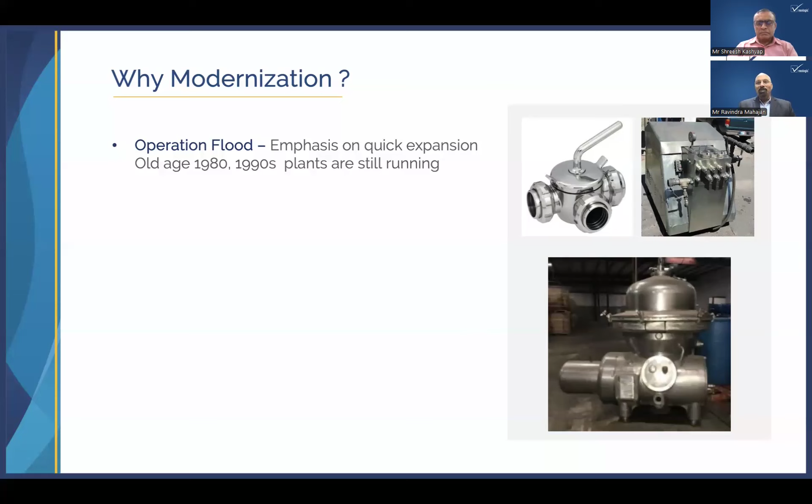There are equipment life issues. The energy efficiency factor is very important today. The old separators are consuming almost double the power compared to new separators. Technological upgradation of such equipment, like old homogenizers and separators, is not possible. Some of the tanks do not have provision to add instrumentation. These systems are old and inefficient, while so many technological advancements are happening. So high processing cost is one challenge of running an old dairy.

There is perishable industry risk, because there are chances of sudden failures - sudden mechanical failures, sealing failures, CIP failures. All these failures are a risk for a perishable industry, and sudden shutdown of the plant totally disrupts production and supply to the market, and you can't accept milk unless there is space in the dairy. Also, obsolete spare parts are an issue - these equipments are phased out by the original manufacturers, and you face challenges in getting spare parts.

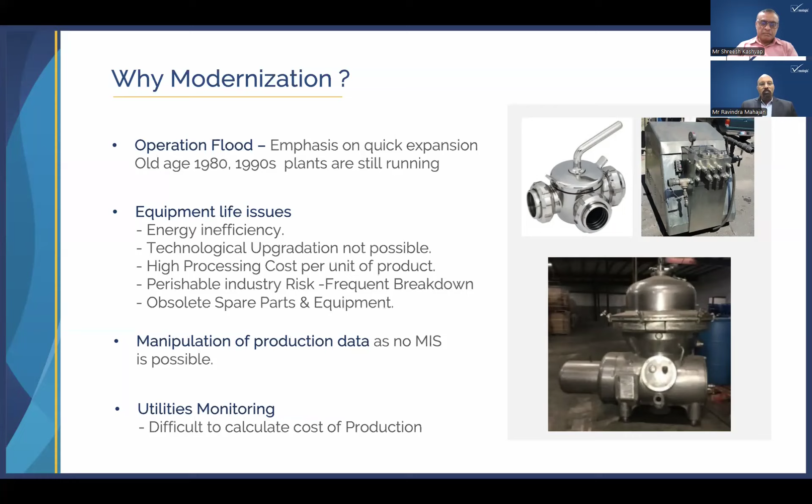Utilities monitoring is difficult. So how efficient my equipment is, how much steam and water it is consuming, it's difficult to know. A lot of water is getting wasted, and water is a costly resource.

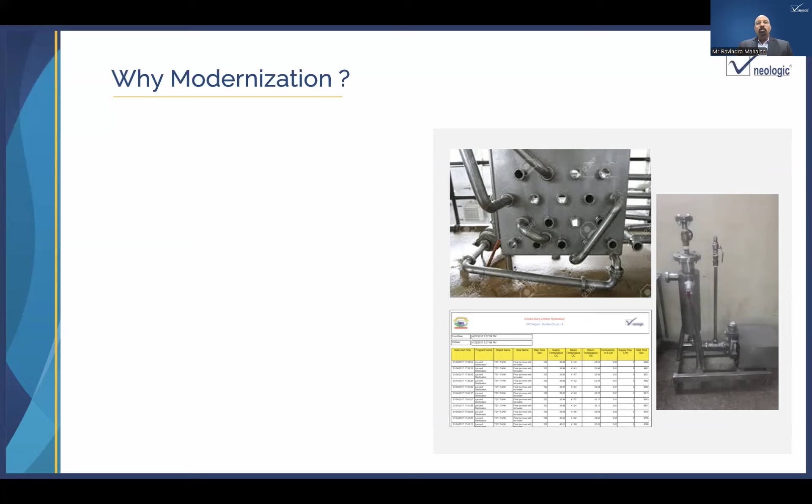Now, you may be familiar with such kind of flow plates. These kind of flow plates are quite common, because they are for the production person's flexible approach. He wants flexibility in taking milk from anywhere to anywhere. Means directly from raw milk to pasteurized milk, to silos, to a balance tank, anywhere they want to take milk, and then they create such flow plates. And it is humanly impossible to remember which connection has gone under cleaning and which is missed out. So this is a hygiene risk.

To fulfill statutory environmental requirements, it is very difficult. Means we have big losses, product losses, and all these product losses end up in our ETP load. And then we have a problem in handling so much product in the ETP. It is an additional loss, but it is also a problem to treat.

Growing demand to have MIS reports. As I said, manipulation of reports can happen. So we have to ensure that all the production events, all the production alarms are known to the management, so as to know what is going well and what is not going properly as per the system. So here are some of the report samples.

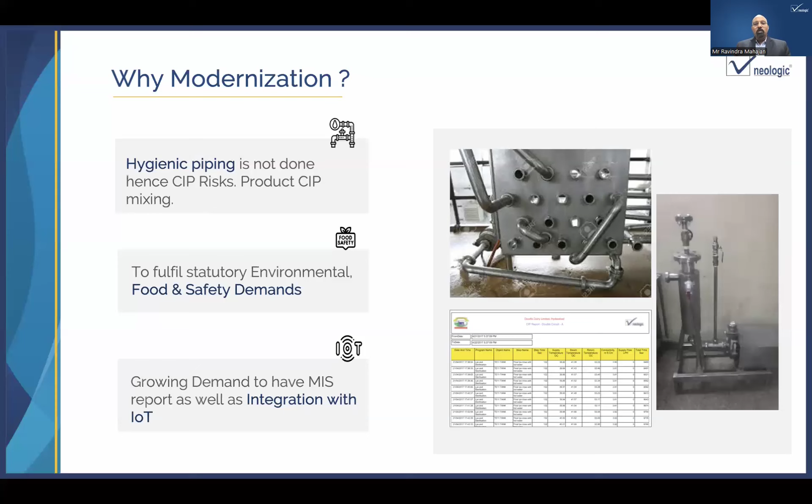Now, in these old dairies, you try to add capacity and you try to add new equipment. But when you add new equipment, even if you have a PLC-controlled pasteurizer, it is difficult to integrate it in the manual plant, because as a system within that module, it is automatic. But when it comes to the integration with the tanks and with the transfer lines, there is no automation. So this is a mismatch of automation functionality, and you really lose the advantage of having a PLC-controlled system added afterwards.

High dependency on operator skills and sincerity. Again, the same point, that operator sincerity is very important. Some operators get confused if there is an alarm, a temperature alarm, what to do. If there is insufficient CIP, where to check the concentration of the CIP. If they are not skilled, it is a risk.

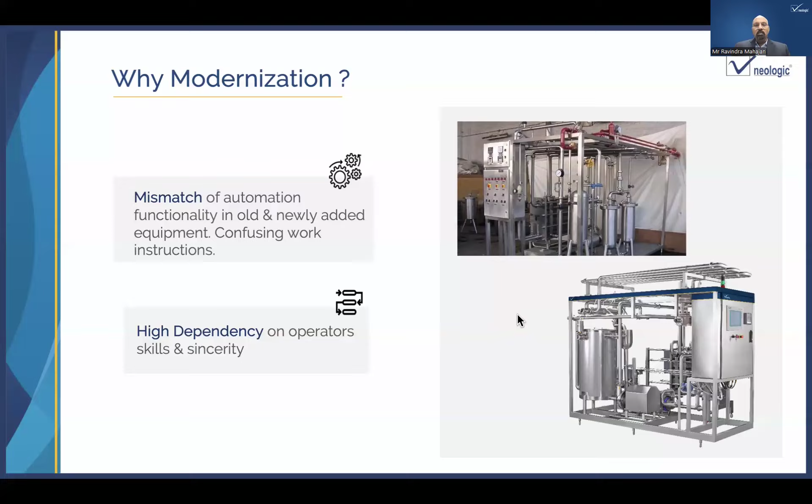So let us see why expansion. Basically, it is not only that you have a plant which was installed during Operation Flood and it has not expanded. It's very unlikely, because growth is the thing that is happening all the time in the dairy industry. We have been growing and we are proud of our growth in the dairy industry.

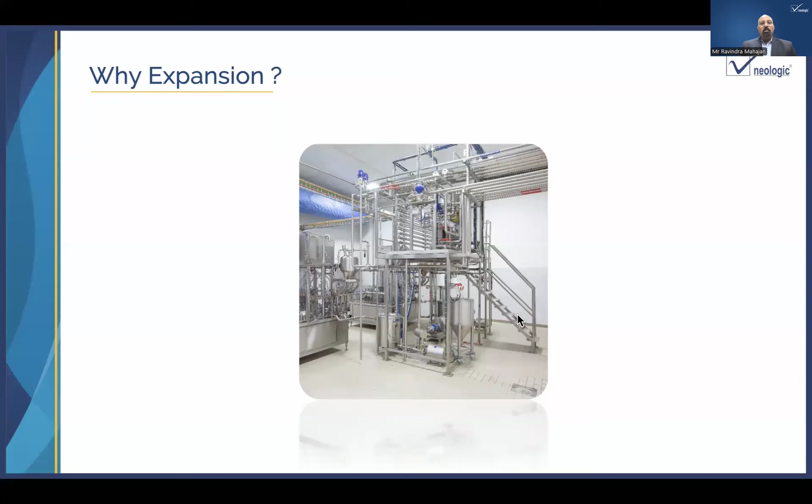And growth in dairy processing is happening in two ways. One is the addition of milk production, which is happening at almost 5-6% over the last few years, as well as the shift happening from the unorganized sector to the organized sector. That's why there is a growing demand and expansion requirement for the dairy industry. So there is growing market demand.

Then engage with co-packing opportunities. So now a concept is that you want to establish a facility and you want to establish a market, but if you still have spare processing capacity, you will partner with other brands, which is very common in aseptic technology, UHT plants, where in one factory 4, 5, 7 brands are packed. So when such multiple brands are packed, the expansion requirement, modernization requirement, and MIS reports requirement is more stringent.

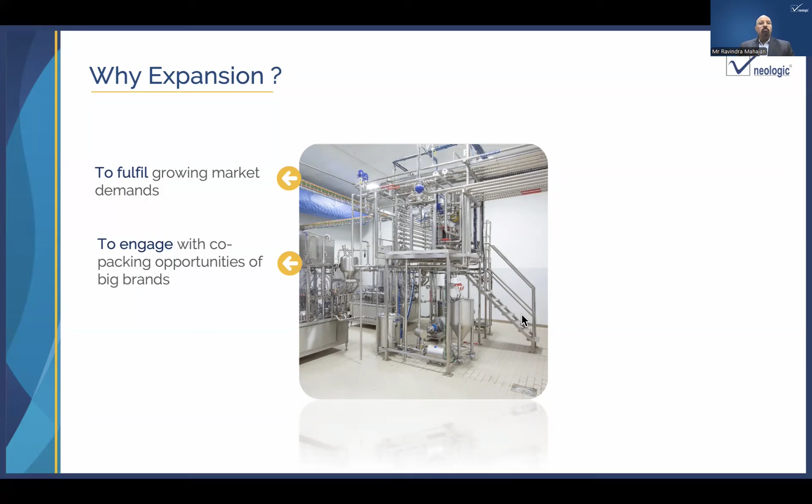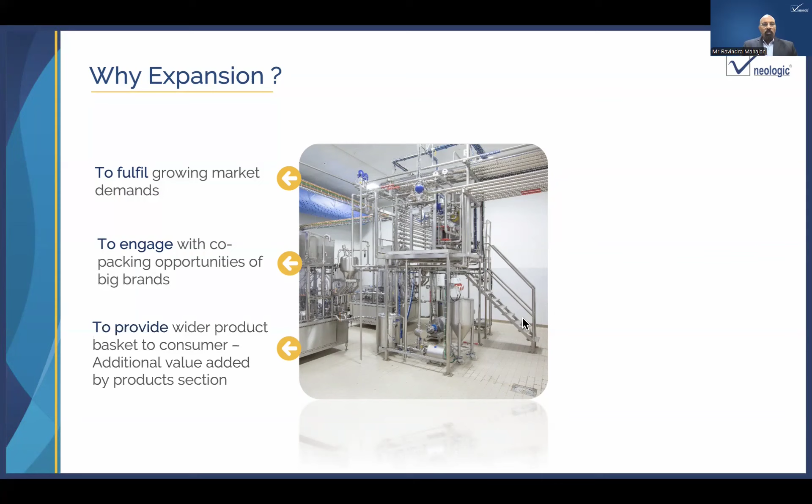So it can create a wider product basket. If you are packing only curd today, you would like to go for yogurt, fruit yogurt, you would like to go for lassi, buttermilk. So the expansion has to take place.

Then to reduce working hours, now we cannot say that all operations will run as a default for 3 shifts operation. If we can optimize our operations and streamline the process time scheduling, then we will get better efficiency and utilization.

Diversification into other products such as dairy, juice, yogurt. This is very common in the aseptic plant that sterilizer and filling machine, which is installed for dairy, will get used for juice also and yogurt also. To meet quality demands and export market, you need expansion, you need modernization, and this is not driven by us only, but also driven by the stringent quality requirements of overseas market.

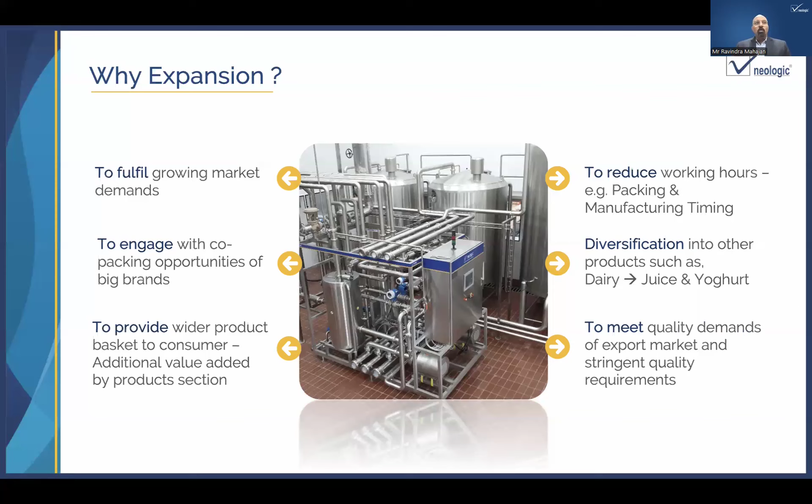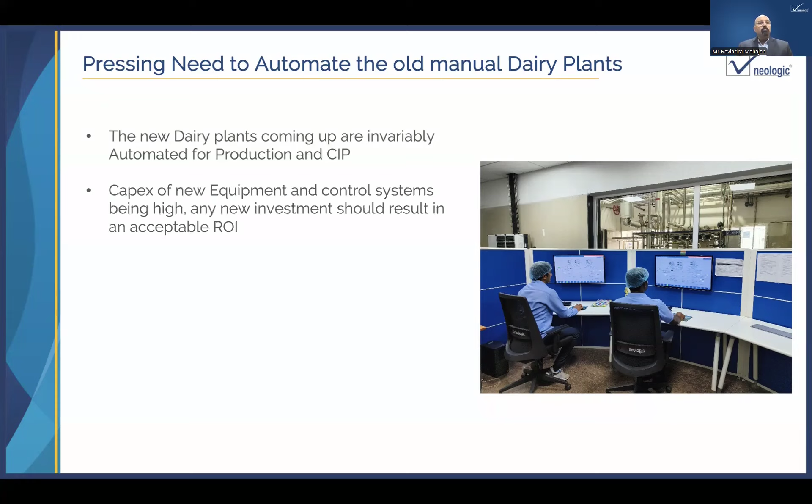So why to automate? Let us see. New dairy plants coming up are invariably automated for production and CIP. But why? Because it gives the distinct advantages of hygiene, distinct advantages of better efficiency, and many people think that automation is extremely costly and it is beyond my reach. But we have done case study with our customers and we have found out the marginal extra money that you invest in automation can be recovered in less than 3 years' time. So this is quite attractive and acceptable ROI for most of our dairy processors.

Existing plant control can be automated and semi-automated. It's not that we are recommending 100% automation in each and every area, but yes, hygienic monitoring of even semi-automated equipment should be done, like the cream process, cream transfer, butter transfer, or butter to ghee and ghee making. Those may not be 100% automated, but we can still do the monitoring and CIP control in these areas.

So end result, we should have better productivity and better equipment availability, because you can plot and understand which equipment is engaged for how much time and which equipment was waiting for CIP for longer time. So desired level of plant hygiene, of course, we will get, because nothing is open, nothing is handled manually, and the CIP also is happening in place. So you are not opening any piping or any flow plates to do the physical cleaning.

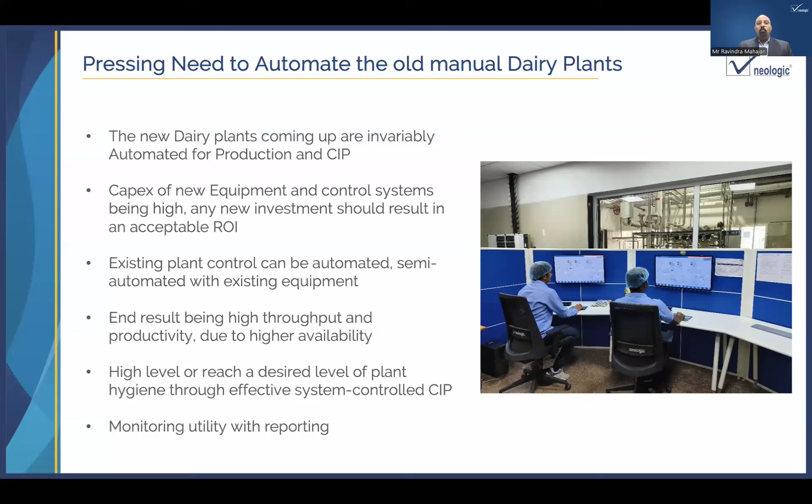And utility monitoring, you can plan section wise or on a broad plant level how much steam is consumed per day, how much electricity is consumed, how much water is consumed, and how I can arrive at my per liter cost of processing.

Why automation actually? So this automation gives numerous benefits. In the automation, you can do a queuing function. Now, in manual plant, you have to either use the traditional plug valves or use flow plates to change from one tank to the other tank. Once one tank is empty, you want to shift, you have to open the connection and it becomes unhygienic. But through valve clusters in automation, you can just keep the tanks in queue function so that once the tank reaches low level, the next tank which is queued will take up the production and there is no interruption in the production for sterilizer and pasteurizers.

There are interlocks like if there is a high level, then the production will stop, the loading will stop. If there is low level, then there will be alarm. If there is no low level and still CIP is requested, CIP will not happen because the program will remember there is a product. So these kind of alarms and interlocks are very, very essential for peace of mind for the operators and production.

Product recovery by water push. You can't have multiple locations and too many sight glasses. So physically verifying the product path and also draining the water at right time is not possible. So either there is a dilution or there is a product wastage. But in automation, you can precisely control how the water flush is happening and how the complete milk is getting recovered into the tank. And also during unloading, you are completely draining the product from the system.

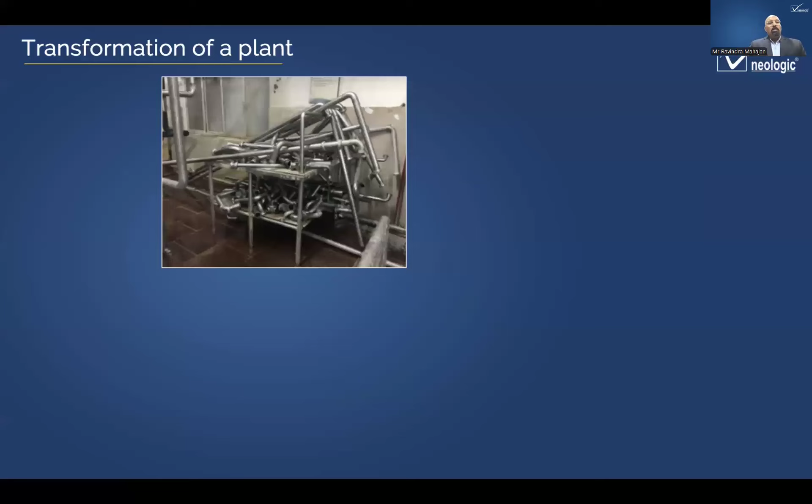So these are the advantages of automation. And see the flexibility. If given a chance, our unskilled operators want to transfer milk to any silo. If there are 5 silos, they want to utilize all 5 silos as a pasteurized milk silo, skim milk silo, raw milk silo, and then they end up with a heap of pipes. And only a supercomputer can understand such kind of complexity and track such kind of connections. But humanly, it is impossible.

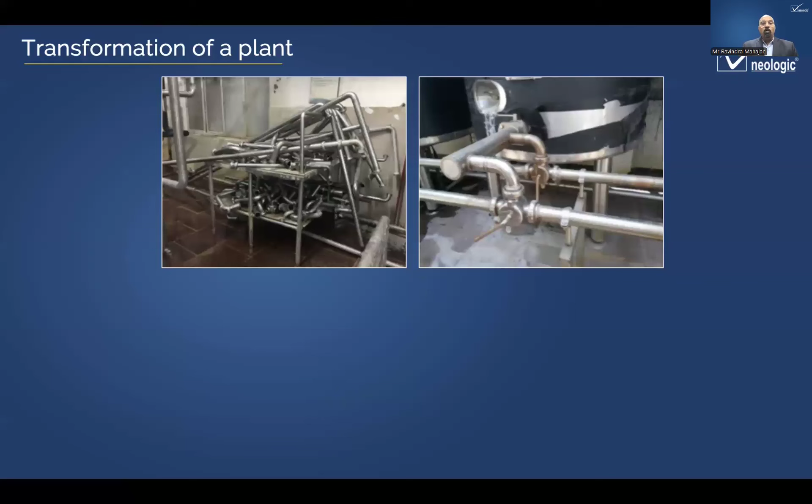You see the other picture where unhygienic connections are made, and there are plug valves used in CIP. A plug valve in CIP is a big risk because hot detergent can shower on an operator or nearby people. There are loose connections. There are chances of leakages, chances of wastage.

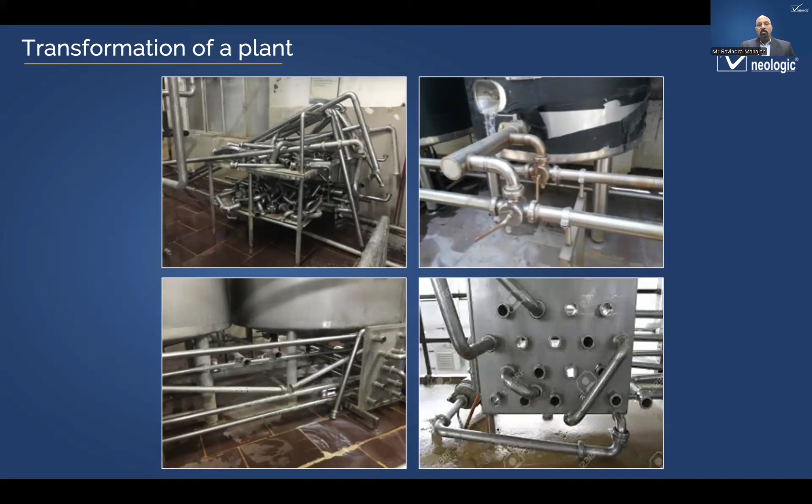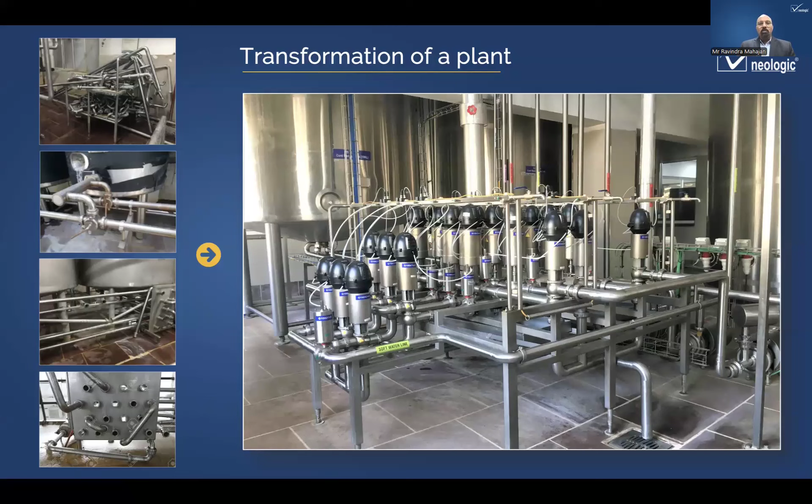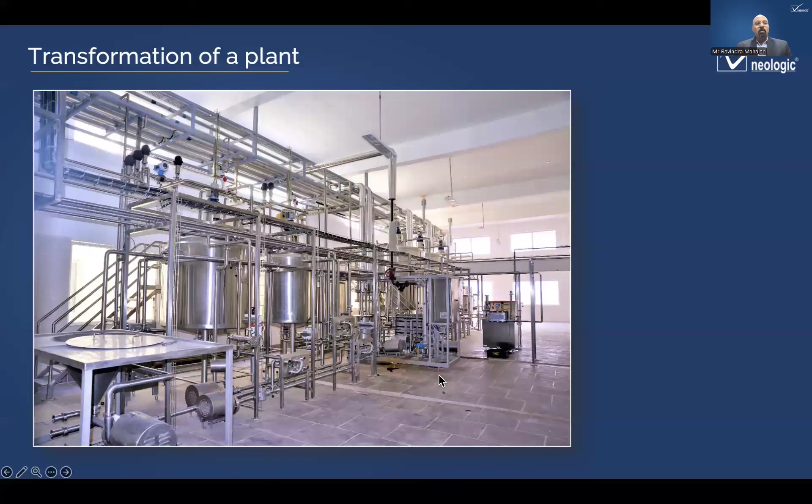Again, too much flexibility. But this all should transfer into a properly engineered, properly designed, well thought automated plant where this flexibility is addressed, where the production safety is addressed, the CIP and product segregation is addressed. So this is an example of a semi-automatic plant. If you see the flow plates here, the flow plates are used because the batches are quite small, but still those flow plates have sensors so that the product and CIP connection will not get intermixed.

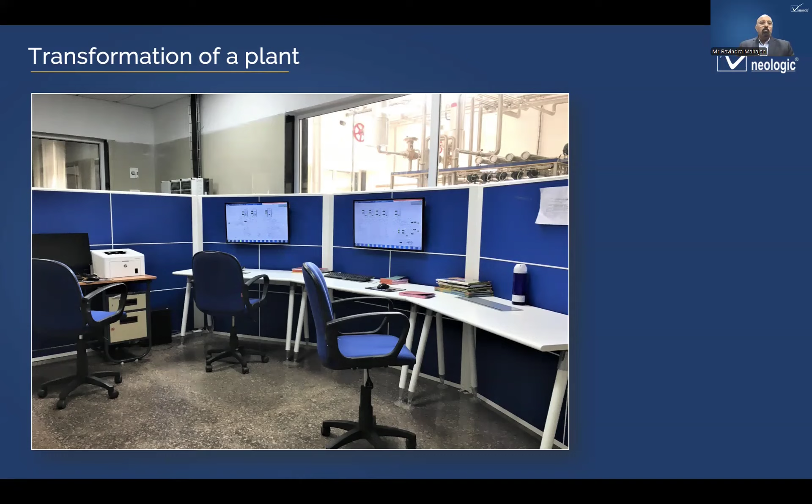This is a topic that is close to every dairy owner and dairy producer. I can say with all my years of experience in the dairy industry, whenever a plant is set up, whether in earlier times or now, there's always a need to expand or modernize the plant, because by the time they have the plant up and running, new technology is coming in, and producers are in the market with better products made in a much more efficient manner.

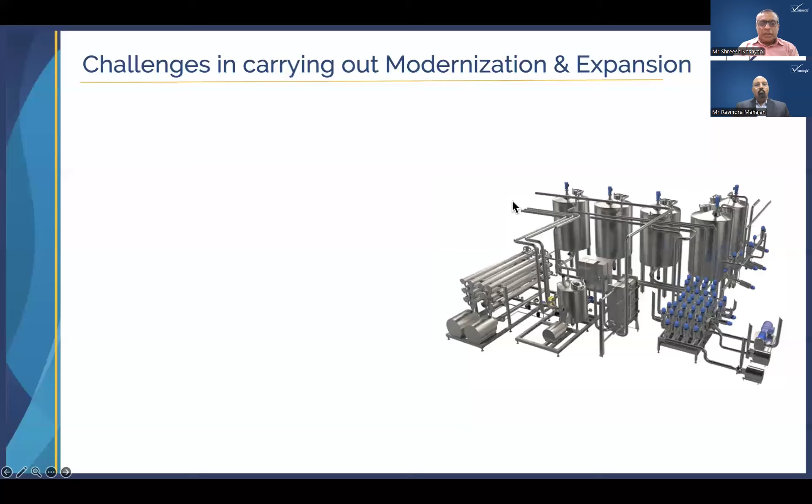So it becomes the need of the people who have already set up the plant to upgrade the plant. So when we talk about modernization, when you say modernize a plant, it could also mean automating the plant, or it could mean refurbishing or even upgrading the plant. These are all terms used in getting what you need in terms of the plant to go ahead. So I will take you briefly through what is needed to go about doing the modernization and the expansion of a plant.

Now, having seen the earlier slides, yes, you as a dairy producer feel the need to modernize or expand the plant. There will still be some questions which have to be answered for the producer to really take the next step. There is always a fear that with modernization I have to spend a lot of money, and they don't see the returns on that money immediately.

Now, as part of Neologic, it gives me great pleasure to say that we have a very good team and skills in this activity of plant upgradation or modernization, and we work very closely with you as customers to make this happen. Definitely, as a producer you will not take the next step unless you know the return on whatever investment we set out to do. So we will help you work out that return on investment, or ROI, so that you will be inclined to take the next step ahead.

There's also a few questions, both as a dairy owner and your own team as well, about the fears, I would say, or challenges of modernization. We should address that before we take the next step as well. As a dairy owner, you will be also thinking that since the upgradation will mean some plant stoppages, I will have a loss of production during the time.

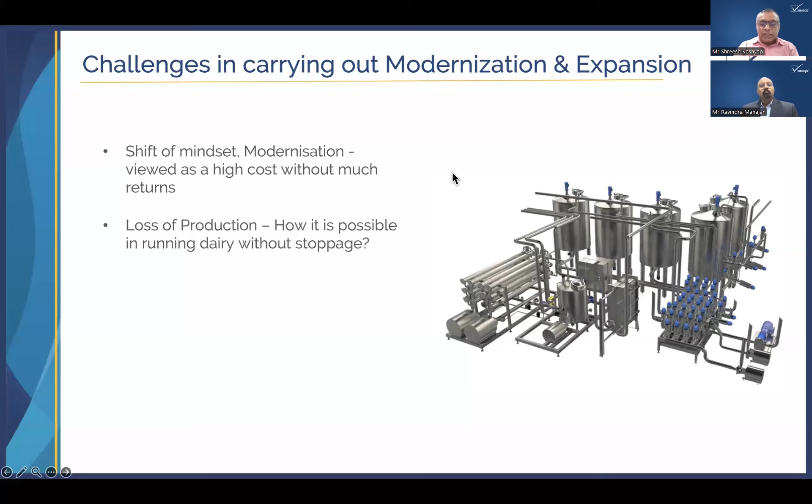Of course, it also means that we had to do a very thorough design and engineering of a particular plant upgrade to see that the plant stoppages are minimum, and most of the work is done offline, either in a workshop or at your plant site, before actually cutting the pipes or the wires and the plant going into stoppages. Next.

There's also many times, as a dairy owner, you will feel that I want to keep the investment in a modernization or expansion to the minimum possible. And one of the challenges is that either you don't have space in your existing plant area, or the building itself is already occupied. And how can I go about adding equipment or adding certain pipelines or valve clusters for the automation? This is where we try to come in.

We try to do a complete analysis of your existing facilities and your layout, and see how it can be optimized or changed to the minimum possible extent, so that the new equipment or the new valve clusters can be accommodated. And of course, sometimes the equipment can be taken to a higher floor or taken on a platform. And of course, we have to work very closely with your engineers and your civil architects as well out here.

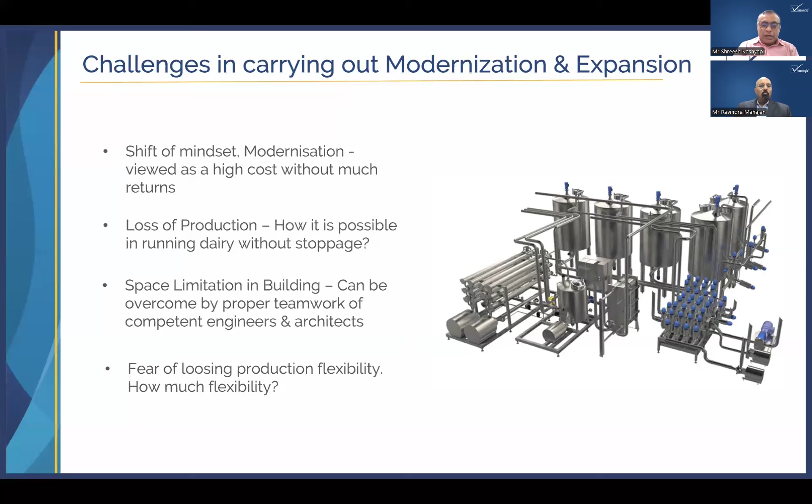There's also the last question, about what your production people will be facing: that once the plant is automated, the existing manual operators will find themselves out of a job. We possibly can address that by upgrading or training your existing operators to run the new modern plant.

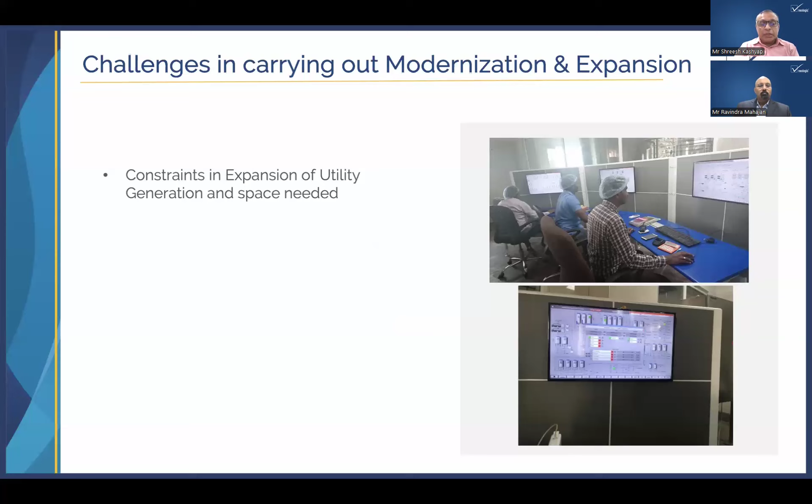Now, going ahead in terms of constraints, if a particular expansion needs expansion of utility generation, we had to look at how that can be done in the given space available and with the minimum possible investment. It may mean upgrading the existing utility equipment, and we'll have to study how that can be done.

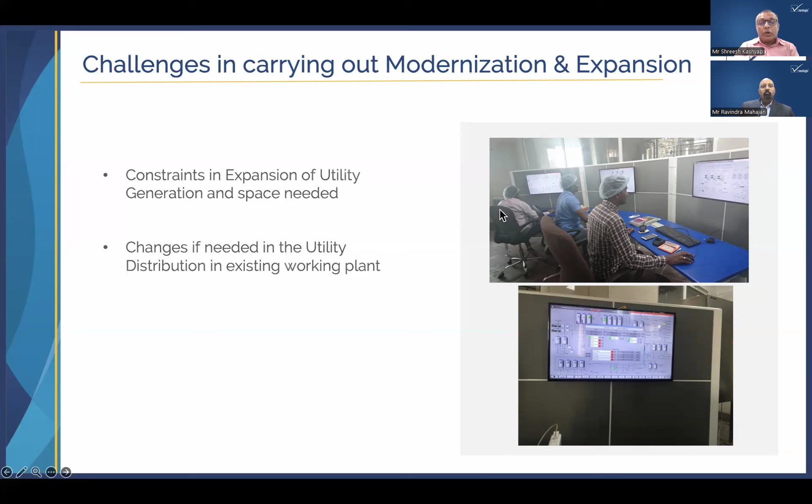Moving ahead, sometimes when you want to reduce your utility cost, you may find that right now you are actually having high steam cost or high fuel cost, and your plant doesn't have condensate recovery. And that's where it may mean reworking the steam distribution or introducing condensate recovery, and that is something that we have to look at in a very smart manner, how that can be introduced into the existing plant.

And I already said training your operators is a very important part, and we have the necessary training programs at our end to train your existing operators who are doing manual operation, to bring up their level of knowledge for operating an automated plant.

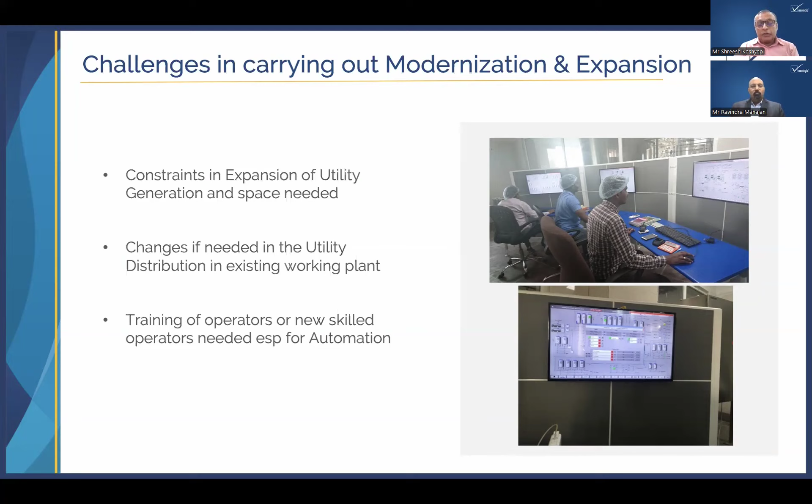Now, the methodology of upgradation. These are of course very generic steps; from plant to plant, it can differ. But I would say when somebody sees a need to upgrade or expand the plant or modernize the plant with automation, one has to look at the existing issues or problem areas you're facing which you would like to address, and that particular upgrade will actually solve the problem. So it is very important to identify those issues, and what we can do to address them, so that once you do the upgrade, that problem will be resolved.

So it is very important to do that. And of course, one has to look at section by section. One need not do the entire plant upgrade at one go. Definitely not. That is not the way to go about it. It has to be done section by section, and it has to be done in a place where it actually has your maximum pain point, where either you are having product losses or having quality issues, or your utility consumptions are higher and you want to address those issues.

Having said that, again, when we said that we need to look at what exactly your pain points are, it could also be that, as we know, the new plants that are coming up are automated or have a high level of hygiene, and those producers' products actually meet the market requirements, from a consumer needs standpoint as well, because consumers are getting very quality conscious as well as food safety conscious, and your product will not be able to meet the requirements there.

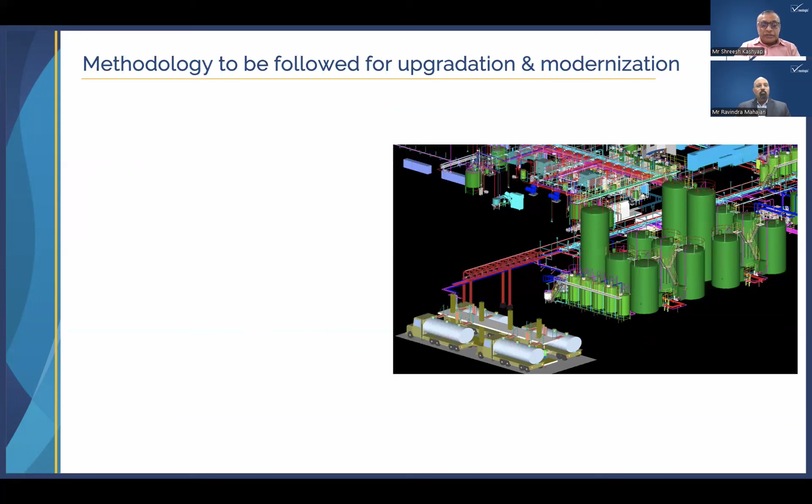So once you share all that data, we will be able to quickly analyze what exactly the problem area is, and whether it can be addressed, if at all. If we see that it is possible to address that, then definitely we'll have to do an audit of your plant.

And once our engineers come to do the audit of the plant, we will actually correlate or study the plant with respect to the data that you already sent, and study the other aspects: where space is available, where the plant can be upgraded, where piping can be changed without much modification, whether space is available for introducing a valve cluster for automated operation, whether any tank needs to be lifted up to accommodate a valve cluster, the instrumentation needed, and the amount of work involved.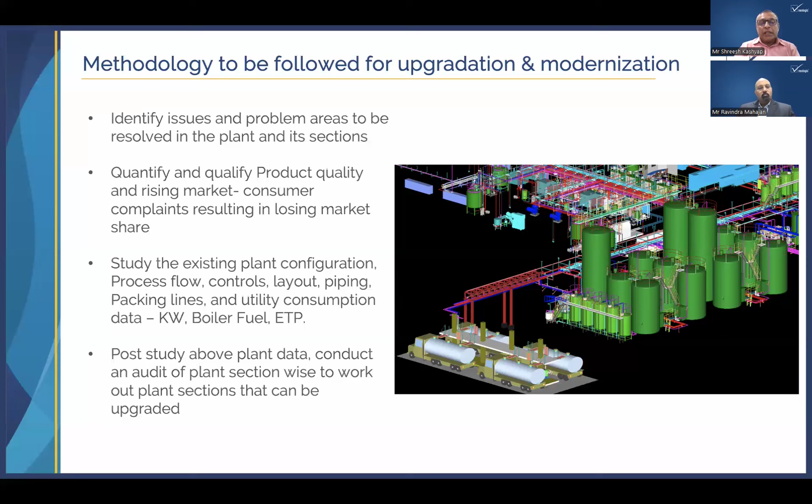So once this particular audit is done by our team along with your people at the plant site, of course we'll work out the cost of doing the upgrade, and then submit a proposal to you. And again, as I said, when we actually start doing it, we look at what production areas we can cover by doing the upgrade.

Whether you want to increase the plant capacity by using the existing equipment, the existing pasteurizers, separators, homogenizers, by making it work more. Also, identify whether there are any gaps in the CIP, and in what way you can introduce a proper CIP, either from a central CIP kitchen, to make sure that the hygiene level of the plant and the products it produces meet industry standards, as well as from a product safety point of view.

As I said, we'll work out the investment needed for the upgradation with a detailed plan as to how to execute it. Because the detailed plan will mean plant shutdowns, which have to be worked out in a manner that doesn't affect your plant production, and of course will mean having the right people at the time to do the plant modification during the shutdowns we take.

Now, once you engage with us to upgrade the plant and give us the responsibility to do that, with our experienced team who have been doing upgrades for many plants across India, we can execute the upgrade order that you give us, and then we go about actually doing the design, engineering, supply, and the installation and commissioning at site.

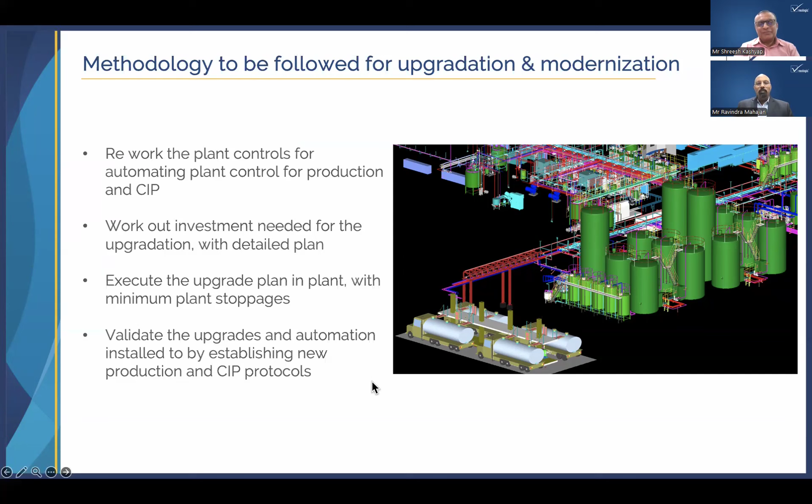Of course, exactly. From a producer's point of view, it's also important that the lakhs of rupees they've spent on equipment when they purchased it, they like to use it as much as possible - 10 years, 15 years, 20 years - as long as it's commercially viable. But operating very inefficient equipment is not really advisable. Still, until they actually set up a new plant, upgrading the existing plant becomes the need of the day, and that's where we can help our customers achieve that.

Thank you. In continuation to the discussion so far, I have taken here a case study about the modernization of an existing dairy plant at Sangam Dairy, Guntur.

So a little brief about Sangam Dairy. Sangam Dairy is located at Vadlamudi, 21 kilometers from Guntur, and is one of the most renowned and trusted dairies in southern India. In 1977, under Operation Flood, NDDB designed and installed this dairy for the Guntur Cooperative Milk Union, which was known as that at the time, and is now incorporated as Sangam Milk Producers Company, Sangam Dairy, since 2013.

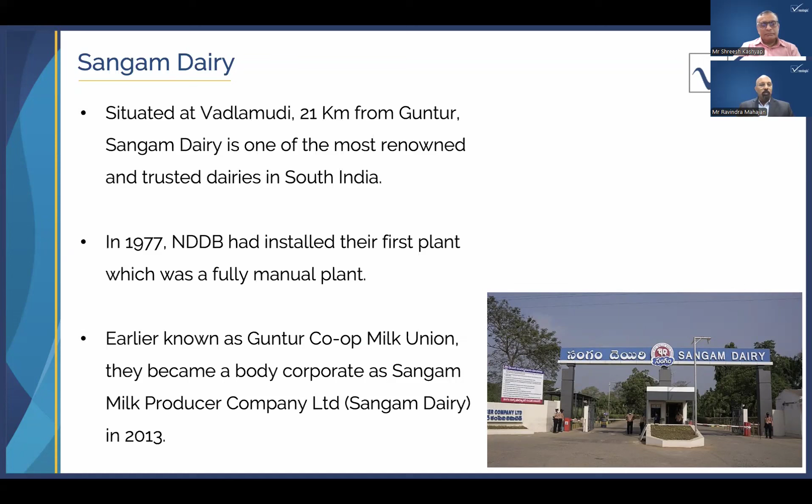They are known for their milk and milk-based products - sweets, beverages, savories, spices, bakery, and many other products. With growing demand, Sangam Dairy kept expanding their processing capacities.

Initially, the plant was suitable for maybe 1.5 lakh liters when NDDB installed it. But over the period, Sangam Dairy went on adding equipment into the same process hall - more tanks, silos - until a situation came where further addition of capacity was not possible, and they were also losing track of the piping and hygienic process expansion.

So with a limited processing capacity of 4 lakh liters in 2018, they had plans to expand milk production up to 8.5 lakh liters because they could foresee the demand.

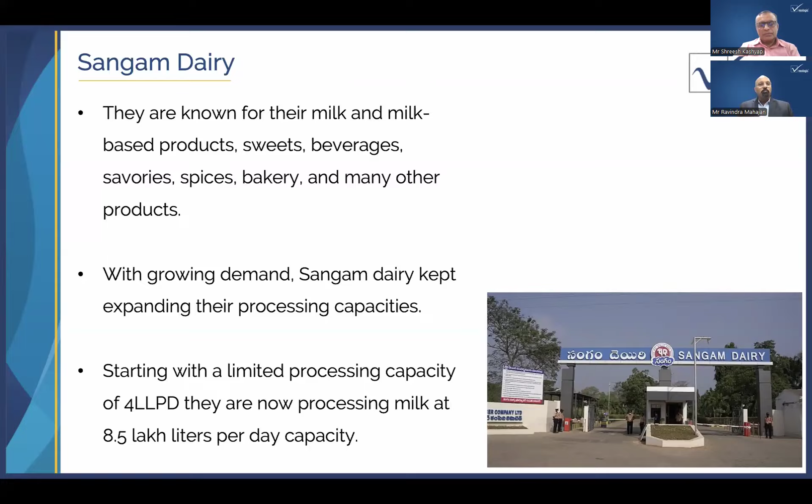What challenges they faced in expansion: the processing lines used were fully manual, and even though the pasteurizers were later taken onto PLC control, the entire plant still required too much human intervention, with too many flow plates. Maintaining high hygienic standards was also difficult.

Space constraints meant not a single corner was available to add even a chiller. Limited scope for civil work was another challenge because this building was made in 1974 to 77 when the dairy started, and all around it there was a powder plant - on one side the area was blocked with silos and roads and everything.

So they thought that to go for expansion they would have to build a completely new greenfield building within the same campus. And a greenfield project starting from scratch may take more than 2 years - that was the apprehension of the management.

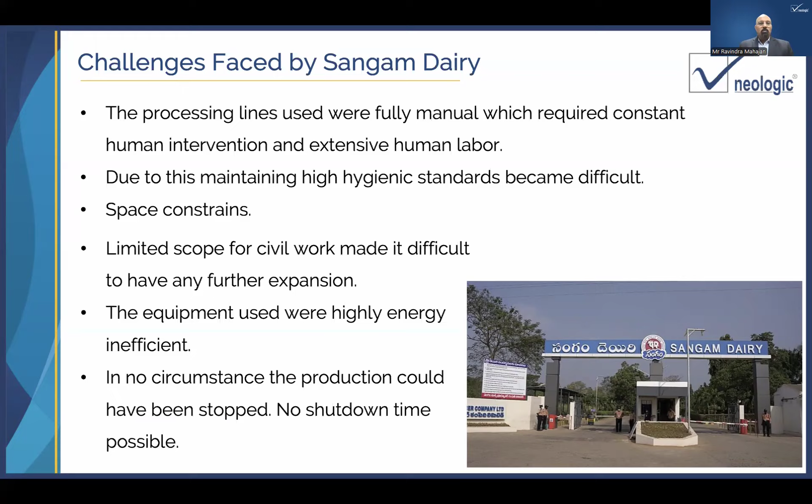So we studied Sangam Dairy in detail. We understood their pain areas - how energy was being consumed more, how the per-liter cost was going up. Another fear they had was that to utilize the existing equipment, they would have to go for a big shutdown. But dairy is a 365-day operation - no shutdown is possible.

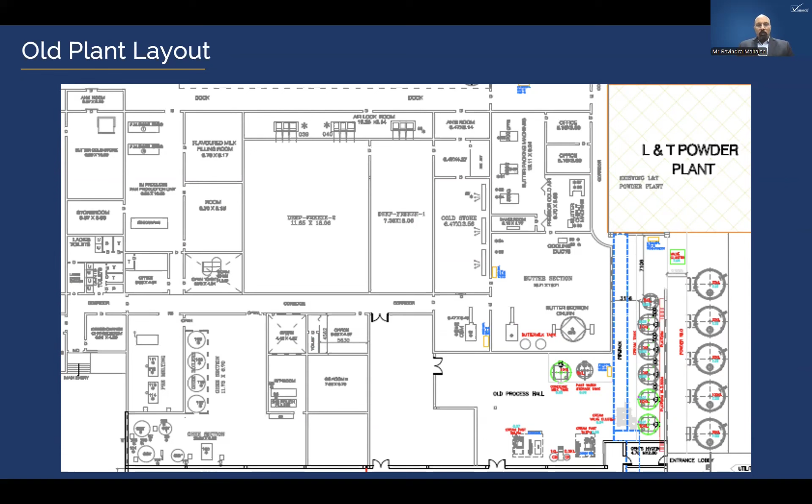So we suggested them to go for an annex process hall, next to the existing process hall. Just an additional process hall, so they don't have to go for a completely new, different building and different campus. This is how we suggested the additional process hall, and we shifted their silos and equipment one by one.

The green part you see is the new equipment added for enhanced capacity up to 8 lakh liter. New CIP was commissioned, new pasteurizers were commissioned, the entire piping valve clusters were established. Some of the silos they could spare were installed as new silos, and we started operations first with new equipment in the new premises.

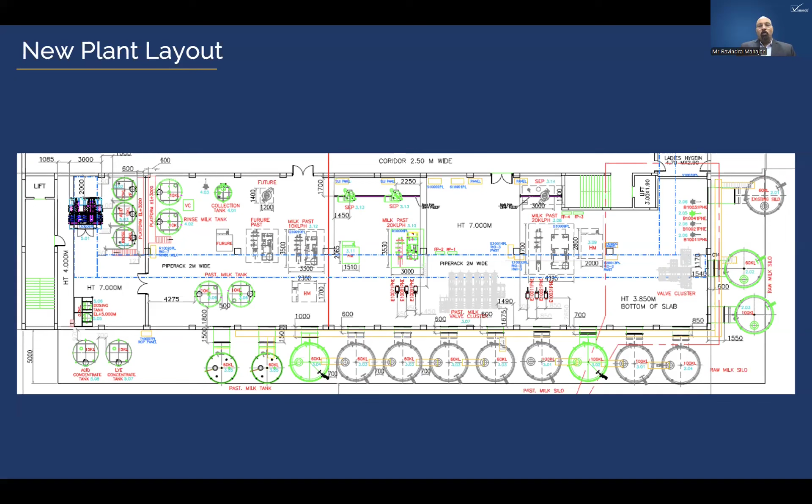As and when there was a shutdown overnight, we shifted some of the equipment, and fortunately we could do it without a single shutdown, without much challenge on production. I can proudly say, with almost nil product loss.

So this is how it looks like - the old dairy, with just a corridor in between. The old superstructure, which is in good condition, was not touched. So we created a process hall, and this is just 20% additional construction they had to do compared to a new greenfield project.

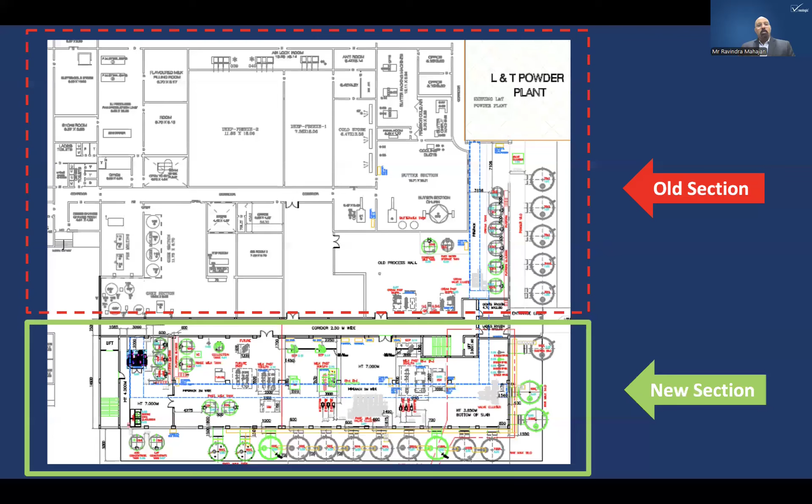Today they are utilizing capacity not just 100%, but even more, because there is automation. They know where the spare capacity is available, which tank is empty, which tank can be utilized for more number of times, and silos. So these are the solutions that we provided at Sangam Dairy.

Automated 4-circuit tanker milk reception, tanker CIP just adjacent to the tanker reception, additional silos, valve clusters, separate valve clusters for pasteurized milk, as well as delivery points to the packaging station and byproduct section. The byproduct station is, by the way, 200 meters away, and still there should not be any product losses, which can be achieved only by automation.

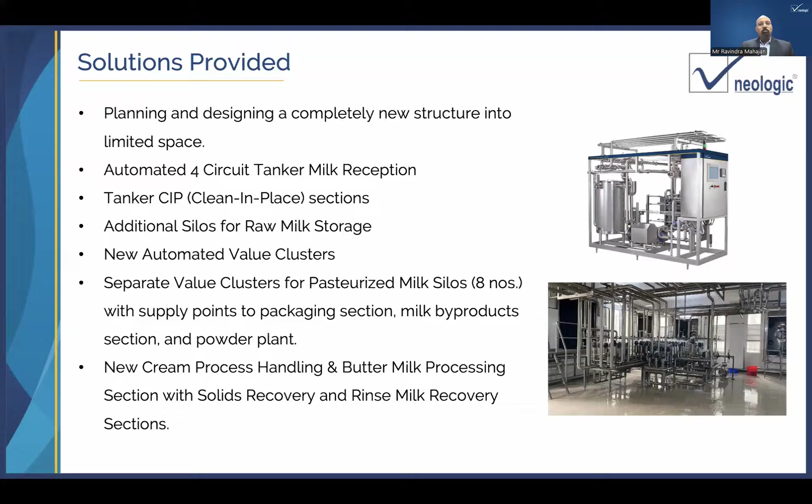Dispatch to the powder plant. So these are some photographs - this is a 4 tanker unloading and 4 tanker CIP bay. These are the new ultra-modern pasteurizers and separators of Alfa Laval. And here's a big valve cluster.

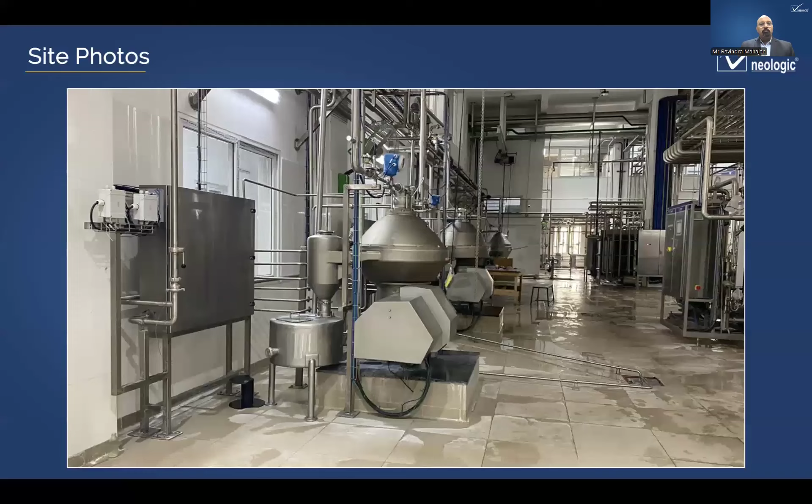That's all. So this is how we have presented a case, and we have discussed the challenges in modernization, methodology, how we should go about the modernization, and a case study.

Shall I take the first question? Yes, please. So the question is from Mr. Murthy: Is it possible to do the expansion and upgradation without stopping the existing running dairy? And normally, how many days will this take?

Yes, it is definitely possible, as we have shared in the case study, that it requires micro planning. It requires a thorough understanding of the operations of the dairy, and based on new equipment and old equipment utilization, we can do the micro planning, and without stoppage of the dairy, upgradation is possible. How many days it will take really depends on a case to case basis. Sometimes you can shift the equipment just overnight, but before that we have to make a lot of preparations - the new establishment, new utility lines already laid and ready and tested, to add that machine suddenly. So it is a case to case basis, I can say.